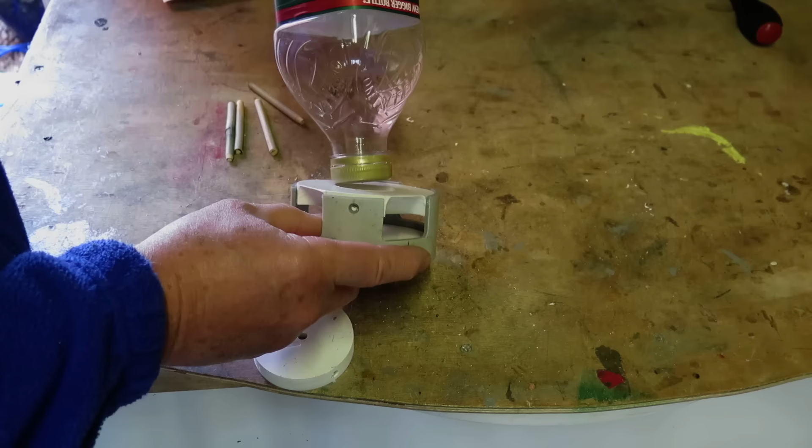This fits in here like that. Make sure that the chamfers are lined up with a hole. So you secure the top and bottom in place, and then put the bottle in, or glue the cap in.

Of course, then you need to cut out the bottom of the cap so that the seed tumbles into the feeder. This piece is something I put on the bottom.

So this, it's a piece of scrap material, so that hole doesn't matter, but I put a bolt through to hold it to the bottom, and then cross drill it and drive these pegs in, and they'll be the perches for the birds.

And that's pretty much it. Screw it together with the ordinary wood screws. So I'll assemble it and show you how it looks.

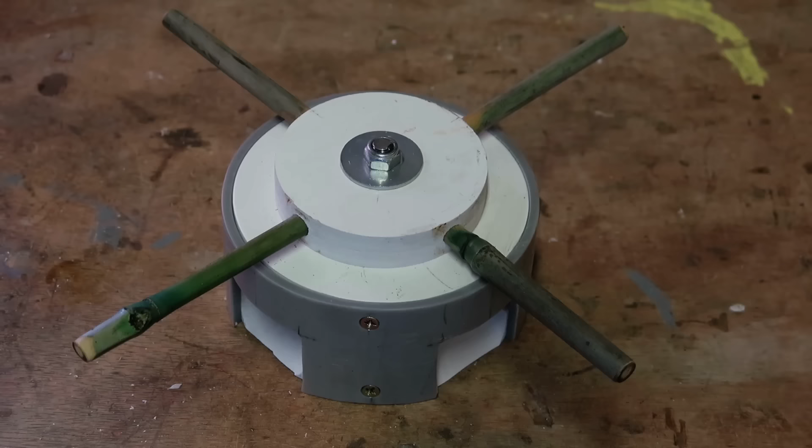Now I've driven the perches into the bottom disc and bolted the disc to the bottom of the feeder, and that's almost it.

All that remains to do now is find a means to hook the whole feeder onto the stand where it's going to hang.

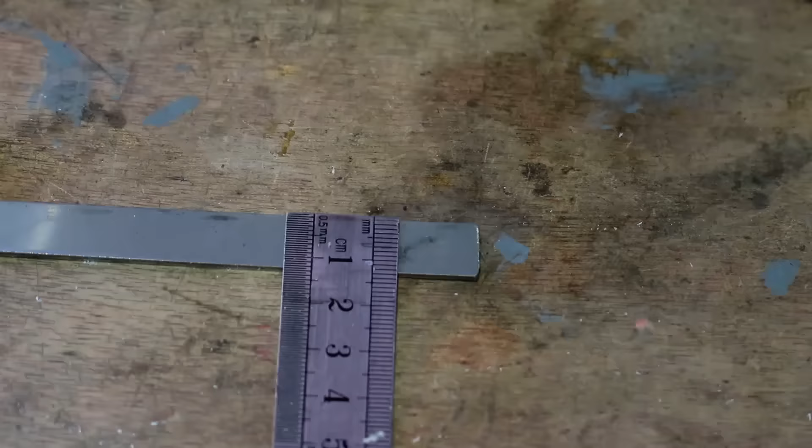For the hanger, I'm going to make a hook out of this flat material. This is about 12 millimeters wide by about a millimeter thick. So I'll drill it so that I can bolt it to the bottom of the bottle and then bend it. I'll drill it first for ease of holding.

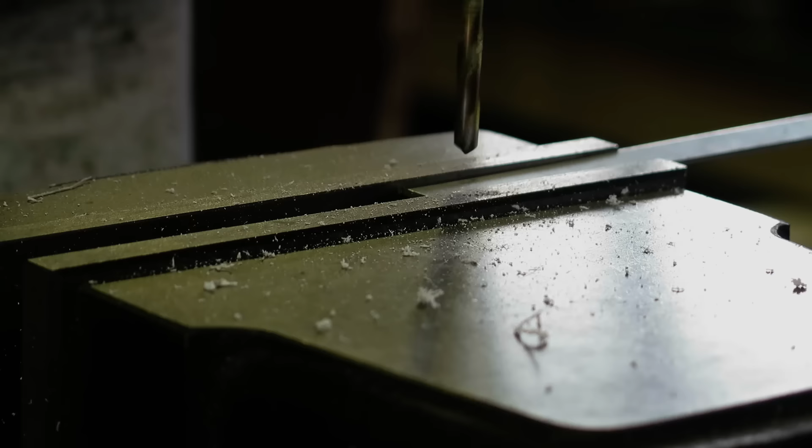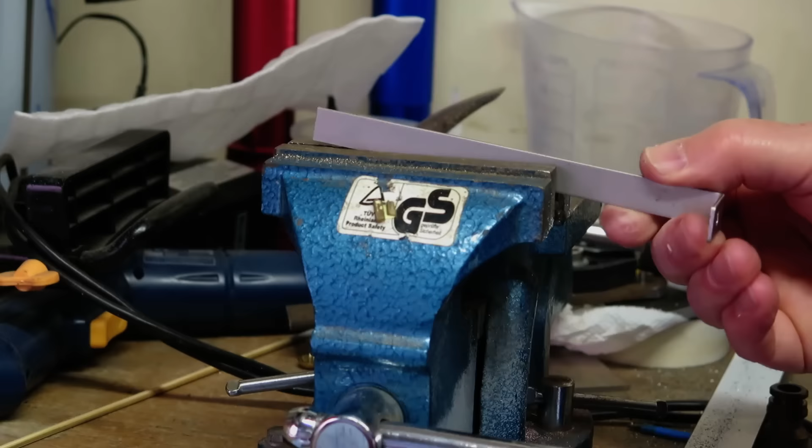So there's the hanger that will screw to the bottom of the bottle. So now I need to drill a hole through the bottle.

These bottles tend to have a little well there, so what I tend to do is put a thick rubber grommet that the bolt goes through to stop the ingress of water. Otherwise the water would collect there and percolate down through the seed that's in the bottle, which probably would make it stick together and maybe even rot.

I'm going to use these cistern washers to put in there, and I'm going to use two of them because this well is quite deep. So I'm going to punch a hole through them using this gizmo.

So now I'm going to use this screw with a trapped washer to put inside the bottle like that, and then I need to fit the two washers on top, and that goes through there. And now I'll tighten it. Well, I haven't got my nut with me, I need to go and get one.

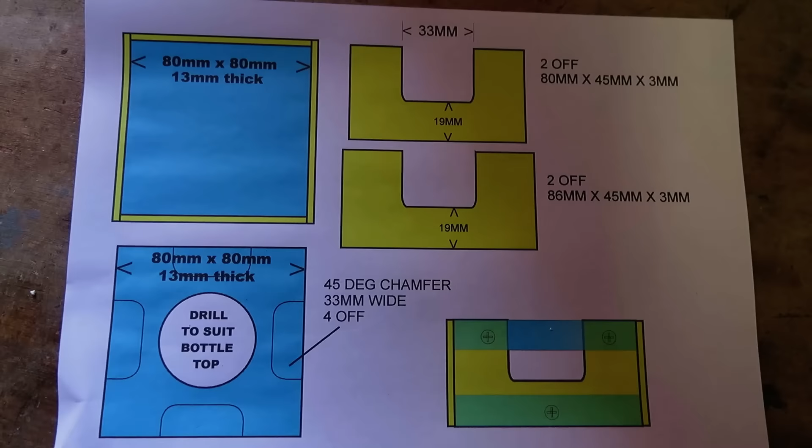So I'll show you a drawing of how to make a square one, or the parts you need. It's pretty obvious how to make them. As I said, if you don't have the 4-inch pipe, you can make the same thing using square materials.

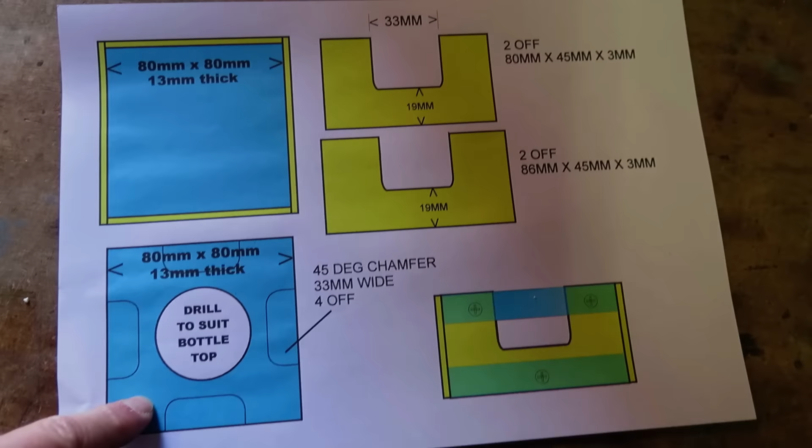Here's a drawing which you can freeze frame and pick up any dimensions that you want. You get the bottom piece in blue there and the top piece. You need 2 side pieces which are the same width as the top and bottom, and 2 if you're using 3mm or 1/8, then they need to be the one piece is 6mm bigger.

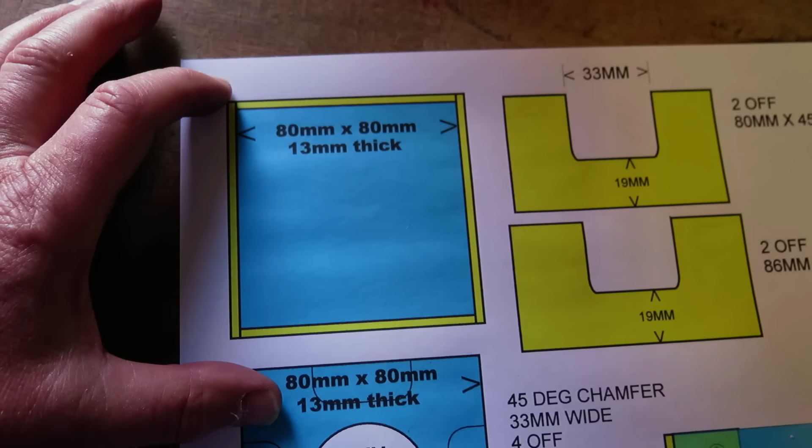And they fit together like this. These side pieces go right out to the end, whereas this piece and this piece are the same width as the top and bottom. So 2 pieces are 80mm, same as this, and 2 pieces are 86mm.

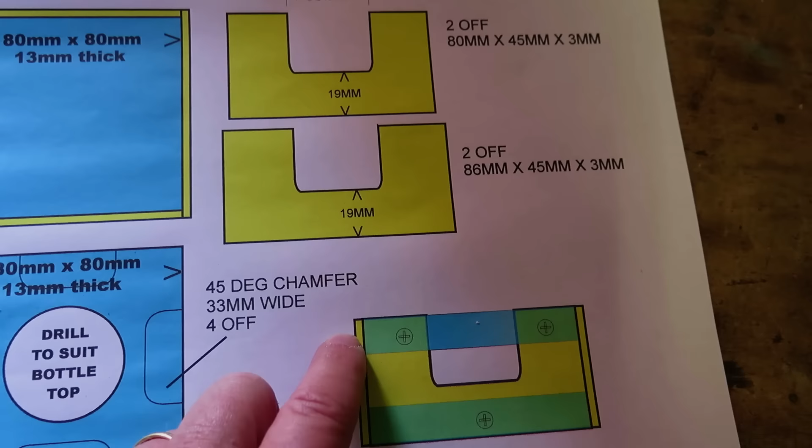When you put the screws in, mind that the screws don't run into each other, so that's why I moved them in a fair distance. I started off and I put them close to the edge, and of course when you put this one in, it bumps into this one, so the bottom's okay because you can get away with 1 screw. But if you need to make square ones, there's some dimensions.